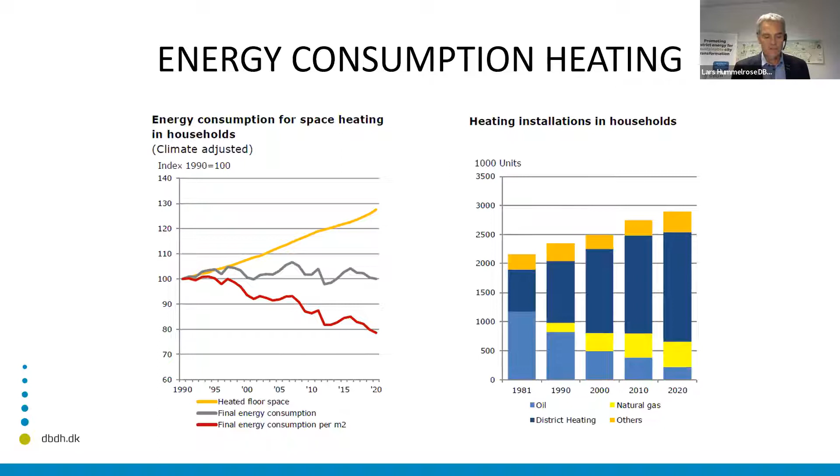Next slide please. But even when we look at what we've delivered with district heating, we've been able to lower CO2 emissions from district heating. The black line at the top shows that CO2 emissions on the right side has decreased from about 5 million tons CO2 to less than half. So we've been able to reduce almost two-thirds of the CO2 in that period in the district heating delivered.

And on the other graph, you can see that renewables cover about two-thirds today, so the district heating coming into your pipelines and into your house is on average two-thirds green. What's not green - well, we still have some for peak load, some natural gas. We have some waste, because in Denmark about 20% of our heat delivery comes from waste incineration, and we still have plastic, some fossil fuels or fossil products left in the waste, which counts as a fossil product even though it's used in combined heat and power waste incineration plants. There's a little bit left, but we're working on getting it out of our system, and I'll get into what we hope for the future.

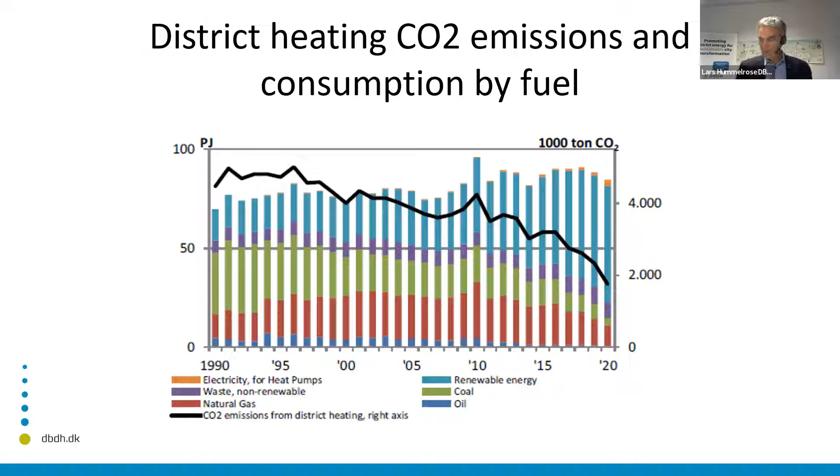Next slide please. So as I always said, two-thirds - more than 50% of total heat demand, two-thirds of all households are on district heating. All homes in Copenhagen, 98%. What's a little bit special about Denmark is that we have 450 independent networks - that's a lot for a small country. So even in smaller towns in Denmark we have district heating, which we don't see so much in other countries.

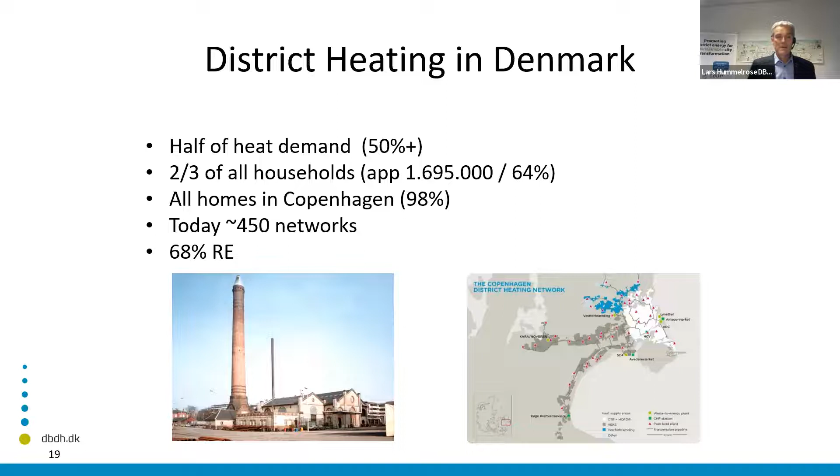We always say, well, district heating, the technology is not complicated. We have companies, I have members who can build the systems. We've done that for 100 years. Yes, of course there's a lot of innovation, and it does matter who you are engaging with, but it has been done, and we have the knowledge of how to build it. So that's not the case.

One thing I also want to point here: why is district heating so important? Well, I always say that district heating is fuel agnostic. The heat in the pipes doesn't care where the heat comes from. In Denmark, we started out with oil. We moved then into coal because that came as the cheapest source. Then we wanted to be greener, we wanted to get away from coal, then came wood pellets.

And now we are more going into electrifying the district heating system and utilizing waste heat and also geothermal heat. So that's the direction we're going now. But the pipelines are the same. I mean, they've been in the ground for 50 years, all the way through, starting with oil and going on this travel towards being more green.

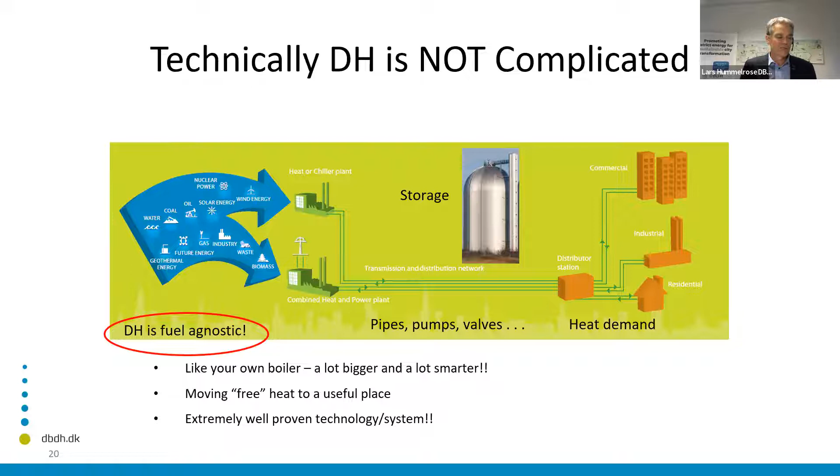So the big thing is, how do you organize it? How do you finance it? How do you get people together? How do you dig up the roads to get these pipes in the ground? Because when they're first there, they're there for the next 50 years, and of course you update and renovate your system, but basically it's the same system. And then you take the cheapest available source, and if you have a green profile, and let's say your city wants to be greener, well, you can shift towards more green heat supply. So that's what I think is the most important thing about district heating: it will be there for many years, and you can green your source as you go along.

In Denmark, I'm not saying what you see and what we tell about Denmark and Copenhagen, you can be inspired. You cannot and should not copy it, but be inspired by what we have done, because every nation and every city is a different case.

In Denmark, we have a long history of consistent energy policy that I can recommend all countries to do. We had an election last night, I went to bed very late because we couldn't really find out who should be the Social Democrats or the Liberals. But basically, when we talk about energy policy, it doesn't really matter, because that is agreed across 90% of the parliament. So it doesn't really matter what government we have, and that's quite important because it's a long-term investment. Stable and consistent conditions are needed to get the investments in.

We have a special business model in Denmark. Most of the bigger district heating networks are owned by the municipalities in separated companies, but the main part of the 450 district heating companies are owned by the consumers in co-ops. What this helps with is what we call democratic ownership, so you have an interest in your system and an influence on what you're getting in your pipelines.

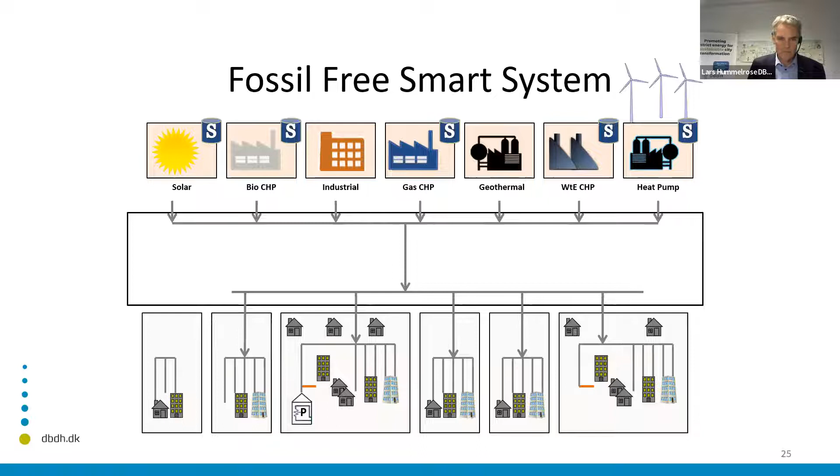My contact details are here, and if you want to know more about district heating, please sign up for our Hot Cool publication, and you're always welcome to reach out. I cannot promise I know the answer, but I know who can answer the question.

Thank you. Thank you, Lars. You're up, Maëlle.

Yes, thank you. Then I will also start my video here.

Thanks a lot, Lars, for the nice presentation of the context of Denmark, and thank you to all of you for giving me the opportunity to present some of Greater Copenhagen's district heating developments and the work of practitioners in reaching carbon neutrality. Let me present myself a little - I work at the Municipality of Copenhagen as an energy planner, in close collaboration with the utility that developed the district heating I'm going to talk about. I actually wrote my PhD about Greater Copenhagen district heating developments, and I didn't know a thing about district heating when I started investigating it, and I found it extremely fascinating.

For the agenda, I'm going to present a little about the development of Greater Copenhagen district heating from the beginning, because it's hard to tell what's happening today without telling what the past was and how it's functioning today. Then I will show you some of the technological possibilities we're looking into for the coming future.

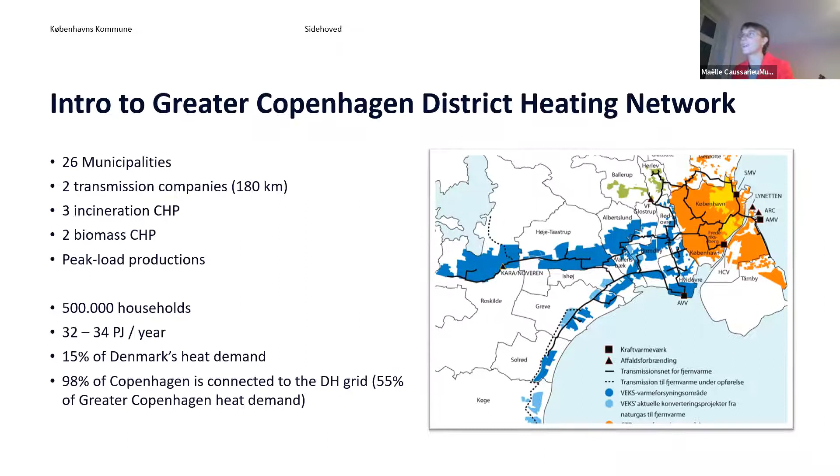If you look into the evolution of the energy mix in Greater Copenhagen, on the left you have a figure showing how there's been a shift in the fuels being used. At the beginning it was mainly coal energy. We went from being dependent on oil to highly relying on coal, and gradually with waste incineration becoming more green because we sort the waste, and the introduction of biomass, we're getting more and more CO2 neutral.

In the figure on the side, you can see in the red line the emissions of CO2 in the district heating system of Greater Copenhagen from the 90s to 2018. We're really decreasing them, and hopefully soon we could reach carbon neutrality.

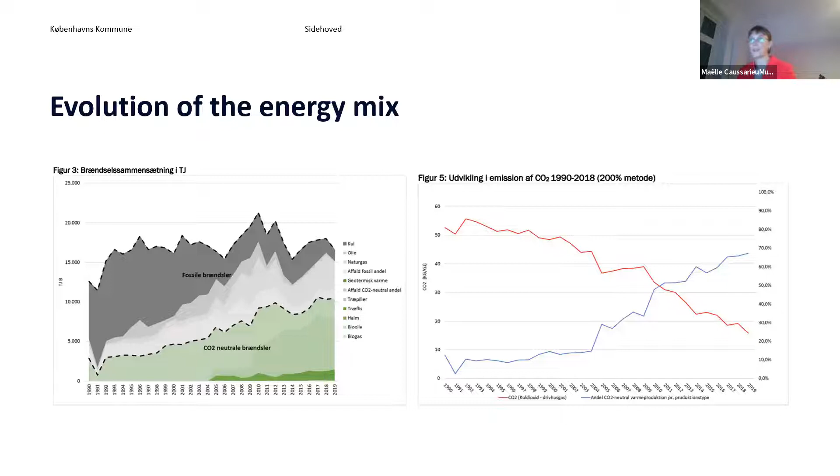Yes, you can go to the next slide. For the transition of the energy system, keeping on transitioning, I think a transition never really has a clear start or a clear end. It's something that's always ongoing work. You could say practitioners are always working for making a transition.

At the beginning, those CHP plants were producing mainly electricity, and surplus heat was kind of a byproduct of the electricity production.

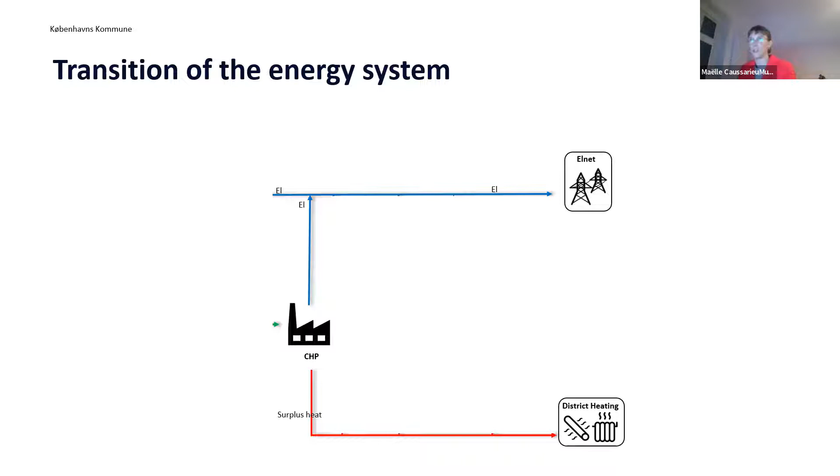If you click once on the slide, we introduced sustainable biomass and more sustainable electricity production, which has meant the price of electricity has decreased. Actually, for CHP plants, the byproduct is not surplus heat anymore, it's more electricity that has become the byproduct, and the main product has become surplus heat. So there has been a change in the way CHP plants have been operated.

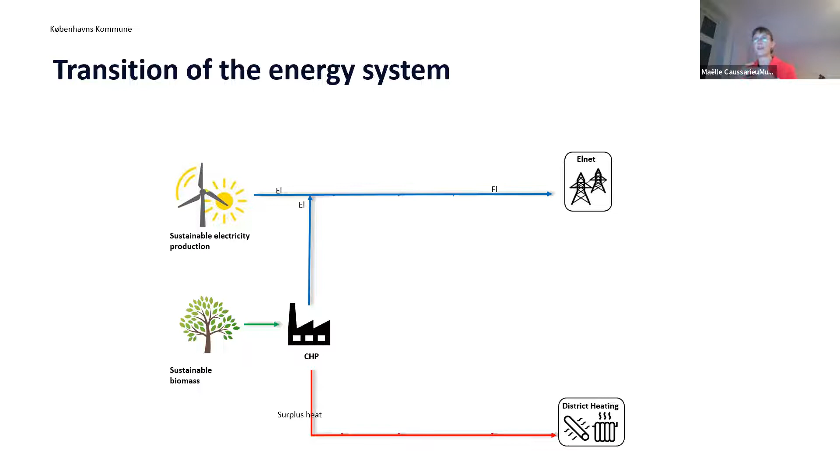So that has been some challenges. Now if you click one more time, this is the energy system that we're looking into and trying to develop at the moment. So a lot more complicated and intertwined.

For example, one of the tasks I'm working with is to implement large-scale heat pumps so that we can reduce the use of sustainable biomass. We would also like to establish carbon capture on the CHP plants we have, so that by shipping it and storing it, we could manage to have carbon neutrality, climate positivity actually.

We would also like to use the CO2 to make new gas or new fuels, e-fuels that can be used in shipping and planes and so on. So this is the puzzle that we're looking into.

If you move something somewhere, if you put too many heat pumps, or too little of this or that, it makes a big difference in the system. So everyone is walking on eggshells, trying to make sure we make the right decision at the right time, because it takes time to implement this new technology.

The last point I want to make, I'm not sure how much time I still have, but one of the problems is that the district heating sector has moved from producing electricity to being a consumer of electricity.

If you see here, there are more and more arrows going down from electricity to the heat sector. So there is this electrification of the system, which means we're a bit worried, or it's a new challenge, in planning enough sustainable electricity production.

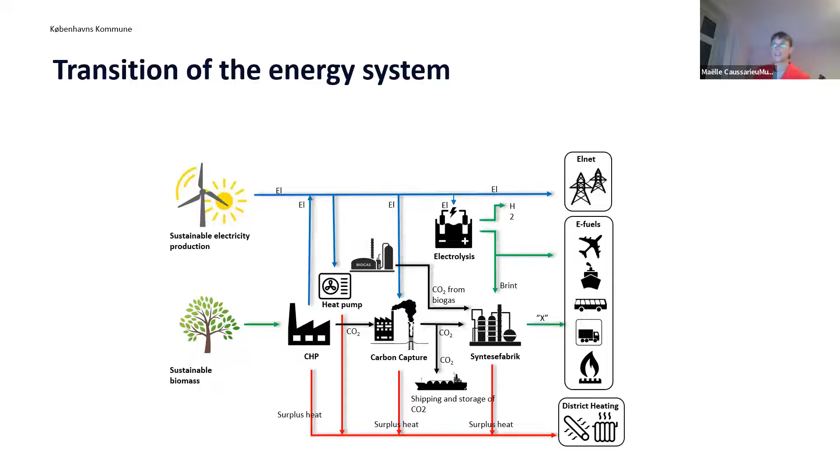So there is a lot of unknown in the development of the energy system, but we keep on working, and I think there is good will from the practitioners to keep working in this system towards carbon neutrality. Yes, and I think that was my last words. Thank you. Okay, thank you, Maëlle.

We've got a few minutes for questions. So just to sum up what you and Lars were saying, the energy crisis of the 70s seemed to have a particularly serious effect on Denmark, and Denmark reacted quite strongly with that law you were talking about before. So what are the remaining significant problems or issues with district energy in Denmark that we should know about in Toronto and North America?

Yeah, that's a very good question. I think some of the challenges—Lars, you're welcome to develop these thoughts—but I think socioeconomic calculations can also be a barrier in establishing new technologies. For example, at the moment, if you look at the investments being made and the economies of scale, biomass can look like the best way to go. But if we want to develop the system towards heat pumps and other resources, to not be so dependent on biomass and to reduce the amount of biomass, we would have to implement new technology that isn't necessarily the best in terms of new investments. So that can impede our investment into alternative technologies. Maybe you have something to say to that, Lars?

No, I agree. With this model you have in Denmark, where you have very easy access to finances, you can sometimes run into wrong investments and over-investments. But what happens then is that consumers pay more, because that's the model in Denmark—you pay for the cost of your delivery. Biomass has been seen for the sector in Denmark as an immediate source, a transition source away from coal and oil. That's the only way we could get away from coal and oil now, and we know that in 20 years it will be more electrical.

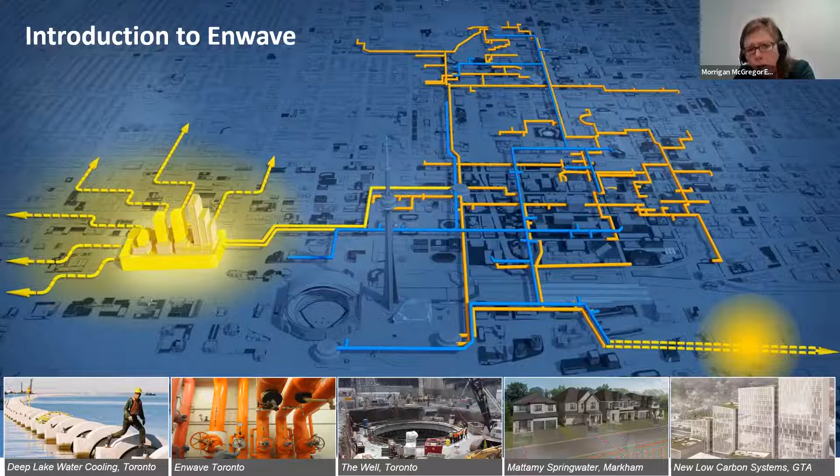To the right of that, this is just intended to represent some additional low carbon system development we're working on through the Toronto area. In Toronto, as well as in neighboring cities like Mississauga, we're seeing increasing interest in developments, a lot of residential development, in finding tangible ways to help them achieve their carbon targets and pathways. We're working on developing a number of systems that incorporate low carbon technologies like GeoExchange and sewage effluent as a few examples into those systems. So I think that's it for me from the slides.

All right, thank you, Morrigan, and we'll move on from there to Diego for his presentation.

Just a bit of background on Creative Energy. Fundamentally, we're a district energy development company. We conceptualize, design, build, own, and operate district energy systems that can instigate massive reductions in GHGs. This slide I'll speak to our background, the next slide I'll speak to what we're doing now, and then we can get onto the discussion portion.

Our company was actually founded as a fuel switch company. Back in the 60s, downtown Vancouver, where our headquarters are, had a bunch of smog and pollution issues from fuel oil heating and coal heating of buildings. Our founders thought, hey, great idea, why don't we build a giant natural gas steam boiler plant, run steam piping to these buildings and let them transition away from coal and fuel oil onto the clean fuel of the future, which at the time was natural gas. Of course, today we're all figuring out how to get off of that. But that was the history of how we were founded back in 1968.

We grew organically as a district energy company in Vancouver, a single asset utility, really connecting one customer after the next. In 2014, we were serving around 45 million square feet of real estate in downtown Vancouver, including St. Paul's Hospital, BC Place, all the big marquee developments. If anybody here is familiar with the iconic Gastown steam clocks, that's actually our steam. But then in 2014, we had new ownership that came with a brand new vision, which was how do we turn a utility company into an energy development company that can instigate these reductions in greenhouse gas emissions.

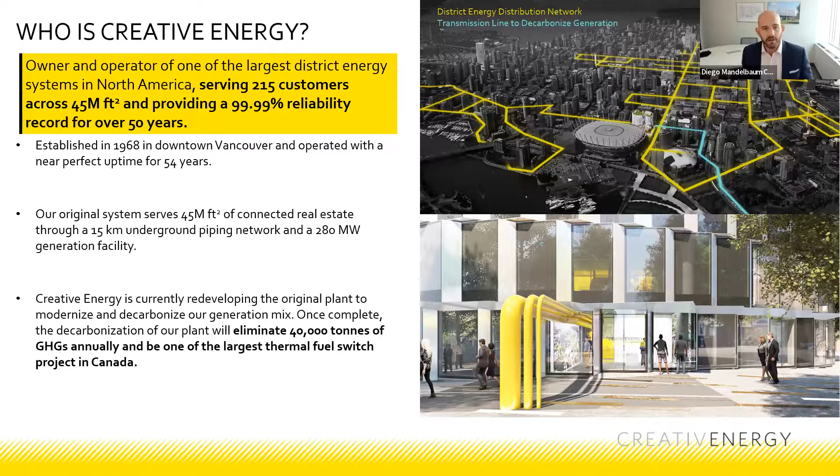That's really what we're doing now. We have about 15 new district energy systems that we're developing between British Columbia, Ontario, Alberta, Pacific Northwest, and California. Somewhat similar to Enwave, we're technology agnostic—we'll mix and match the right technologies to get the best economics while preserving the sustainability value of our district energy systems.

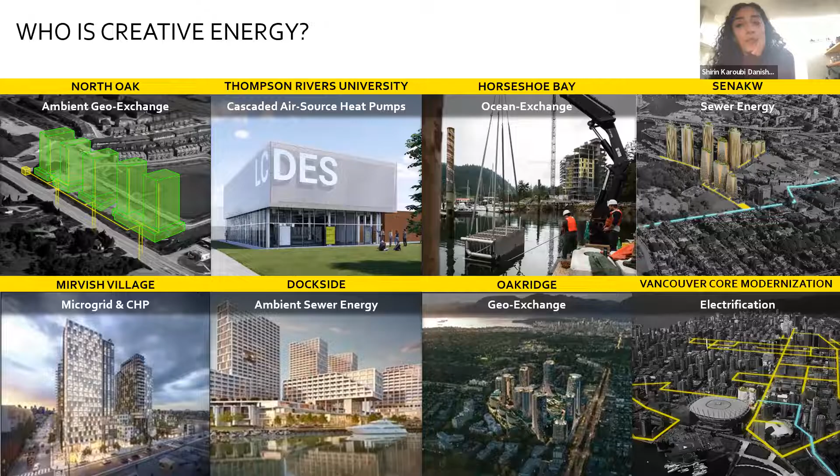I wanted to give an overview of the difference between Denmark and Toronto. I had a slide but it's not letting me share, but it's okay. So just a quick overview of what Denmark has and what Toronto has, to wrap up the discussions we've been doing so far. I'm going to focus a bit on the policy side, because as a planner I think that's a major support for market drivers. And as was discussed earlier on the Copenhagen case study, so Denmark has... okay great, there it is.

So what does Denmark have? We discussed this, and it has a Danish Heating Supply Act, brought in in the 1970s. As Lars mentioned, this is pretty integral in terms of district energy for Denmark and Copenhagen. Why it came about: there was a major oil crisis in the 70s, which was pretty detrimental for Denmark, as it was 100% reliant on energy imports. So you can see how an energy crisis would be pretty catastrophic and a major catalyst for a policy change for heating.

Toronto, Canada doesn't have that. We have a pretty good set of resources that we're still using in terms of natural gas. Outside of that, Denmark has a culture of cooperative ownership, which Maël was mentioning before, and this came from the agriculture sector and went into energy. This sharing of infrastructure has been pretty integral, and as a result, from the Heating Supply Act, there's a nonprofit clause where you can't make money off of it. That's not something Canada has either.

So it definitely sets up a completely different market landscape for us, which I guess doesn't necessarily mean we can't do district energy. It just means it's a different way of navigating the market.